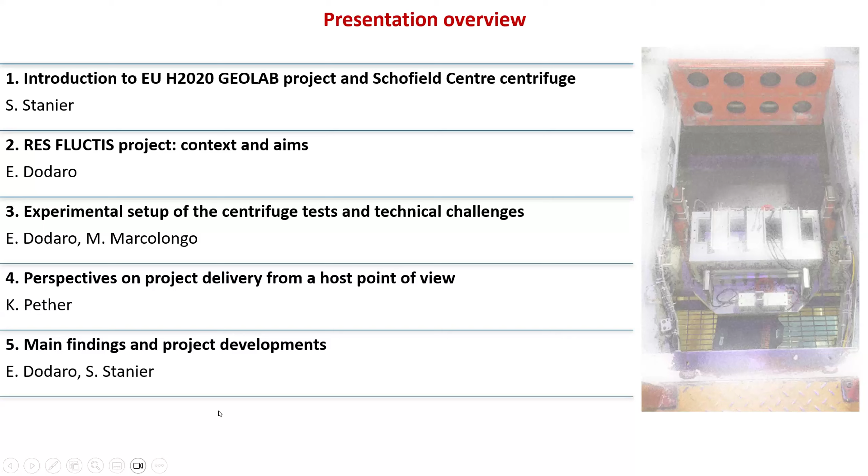Okay, here we are. First of all, why GeoLab? What is GeoLab? GeoLab is a consortium of partners across Europe that each have a piece of physical infrastructure that can be used for physical modeling of geotechnical problems.

The focus of GeoLab is on critical infrastructure that's threatened by climate change, extreme weather, geohazards, aging, intensified usage, all of these kinds of things.

The idea of GeoLab was that it was to be a network across which the whole of Europe could have access to these disparate and different facilities that each had different capabilities for performing physical model tests. So the idea of GeoLab was to bring those facilities together.

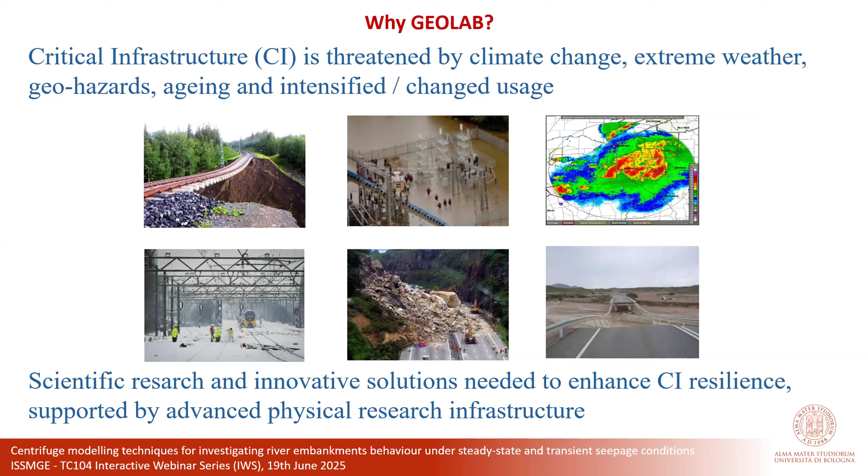We had 3 separate competitions for funding for non-participants of GeoLab to apply for, and they were each targeting one of the facilities that we host across Europe, which you can see on the next slide.

So GeoLab, if you think about it in terms of the infrastructure it provides, it's just a kind of one-stop shop going from small-scale laboratory testing, which we focused on mainly in Slovenia, but quite a lot of the other facilities have aspects of laboratory testing that were available to participants too.

We have a large number of centrifuges, which is what we might refer to as our mid-scale modeling approach - small-scale models, but with stress similitude accounted for in a centrifuge. There were 7 of those dotted around the various facilities in various forms: beam centrifuge, drum centrifuge. We've even had one be commissioned during the duration of the GeoLab project itself, in Zurich.

Then there are what we call large scale, and there are 3 such facilities looking at full scale testing in the lab, or close to full scale. And then finally, we had 1 field testing suite in Norway.

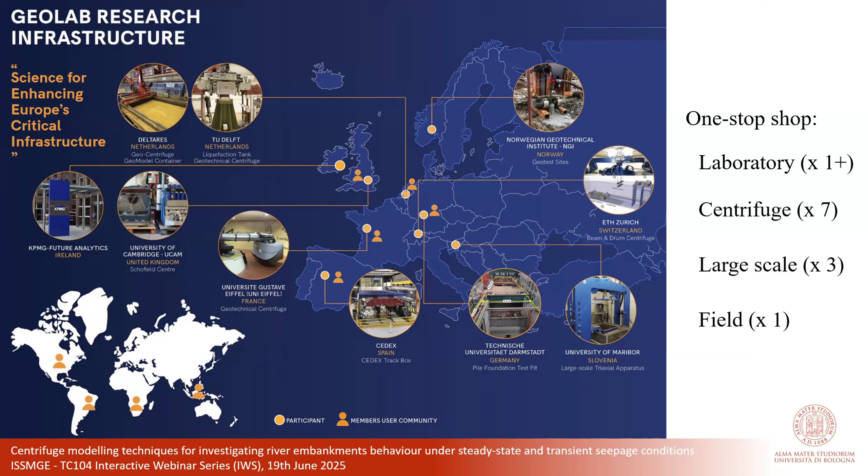So altogether, you can see you can cross the scales with the infrastructure that's available for physical modeling at these different institutes. Today's project is going to talk about a project conducted at the University of Cambridge. Moving on to the next slide.

As I've already said, there were 3 rounds of peer-reviewed project calls. The calls were on, firstly, experiments that provide or prove innovative solutions to enhance the resilience of critical infrastructure in Europe. The second call was on experiments to study the pressure on critical infrastructure, particularly impacts of climate change, aging, increased usage, etc. And the third call was about doing experiments that would complement numerical work.

Trying to validate numerical techniques with experimental data. And so across GeoLab over the last 5 years, there were 24 projects awarded that involved 137 separate individuals at 74 institutions and companies. So what we're going to talk about today is just one of those projects.

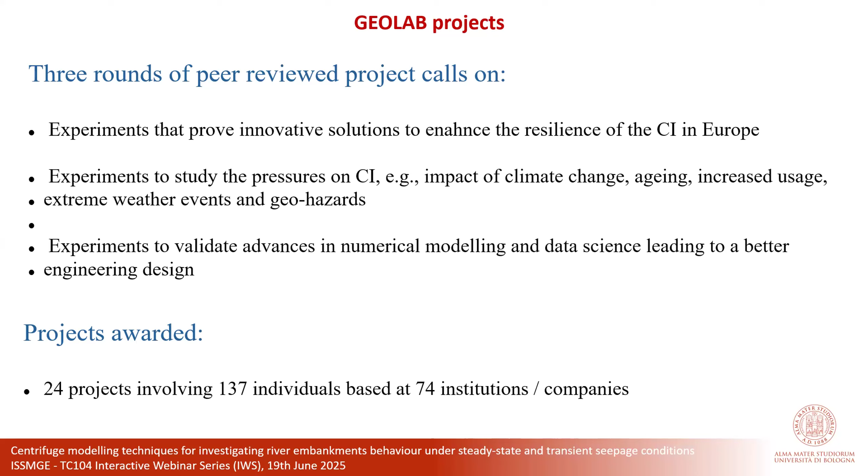Moving on to the next slide. So the focus of today's talk is the Res Fluctis project. It's assessing river embankment stability due to floods, and particularly focusing on unsaturated conditions in the embankment.

The aims of the project were to look at the hydromechanical behavior, but in particular to focus on the effects of the partial saturation in the embankment itself, which is not accounted for in design and can have a significant impact on stability. So what we were really interested in was the failure mechanisms during the onset of slippage of the embankment.

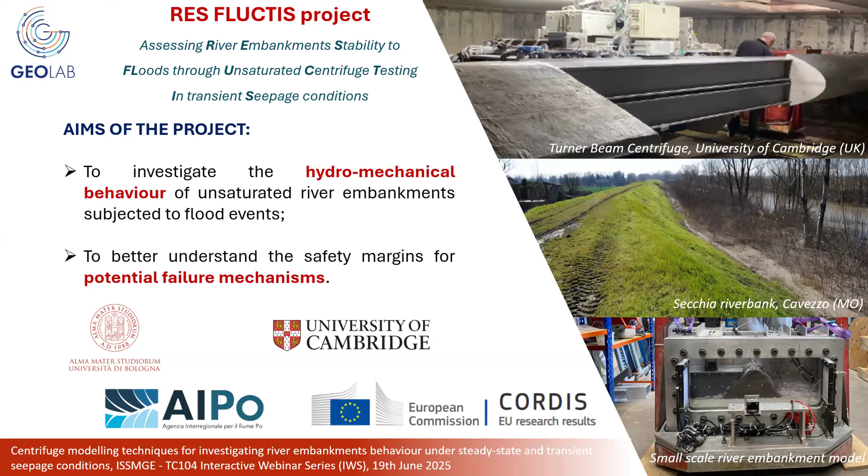And with that, we'll move on to the next speaker, and Eleanor is going to talk you through the context and project aims. Okay, thank you very much, Sam, for the introduction, and good afternoon to everyone. As Sam has already said, I will move quickly to the motivation that led to the GeoLab Res Fluctis project.

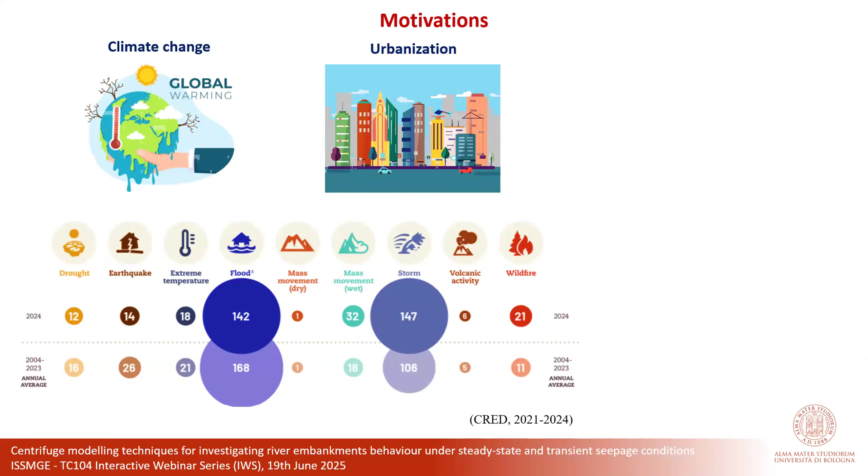We can see that from a geographical point of view, the events were quite unevenly distributed, with a concentration in Western Europe and Southern Europe.

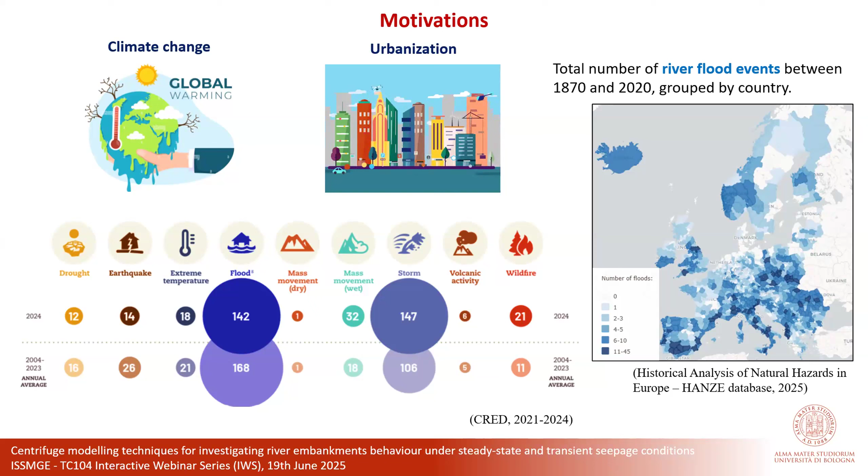Italy was one of the countries most affected by this event, causing casualties, damages, and huge economic losses. So the situation in Italy is

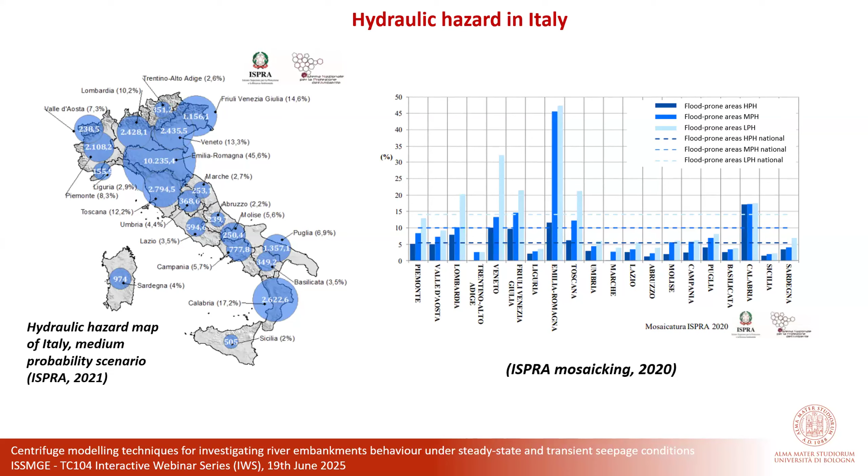and secondary artificial drainage channels. If we talk about Emilia-Romagna, we cannot forget to mention the devastating effect of the flood events that occurred in May 2023, which affected more than 100 rivers, and we observed more than 66 main collapses on 16 rivers.

So the situation was really devastating. Here I reported some pictures and a video from the cited events, and from a subsequent one that occurred in September 2024, in exactly the same areas.

With the red line, you can see the original shape of the embankment section, and with the dashed line, I tried to highlight a typical sliding surface that occurred during the event.

All these embankments present some typical characteristics. They have a height above ground level between 5 and 10 meters, an inclination of the slopes up to 35 degrees, but sometimes in critical sections it can reach 50 degrees.

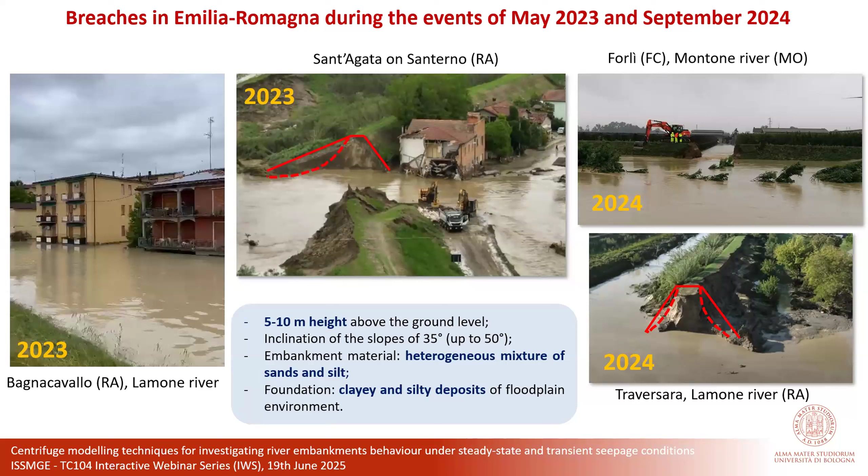The material constituting the embankment is usually a heterogeneous mixture of sands and silts, while the foundation is characterized by deposits of fine-grained material. So if we look at typical failure mechanisms for this kind of earth structure, we can

subdivide them into two big families: hydraulic collapses and structural collapses. From our point of view, the structural collapses are much more interesting, because hydraulic collapses are related only to a capacity problem related to the impoundment of the riverbed.

On the structural collapses, we can identify three main families, all related to the action of the river. We can identify external erosion, which usually affects the inner side of the embankment. Then slope instability, which will be the focus of our project, and we will see some examples of this kind of instability observed in the centrifuge.

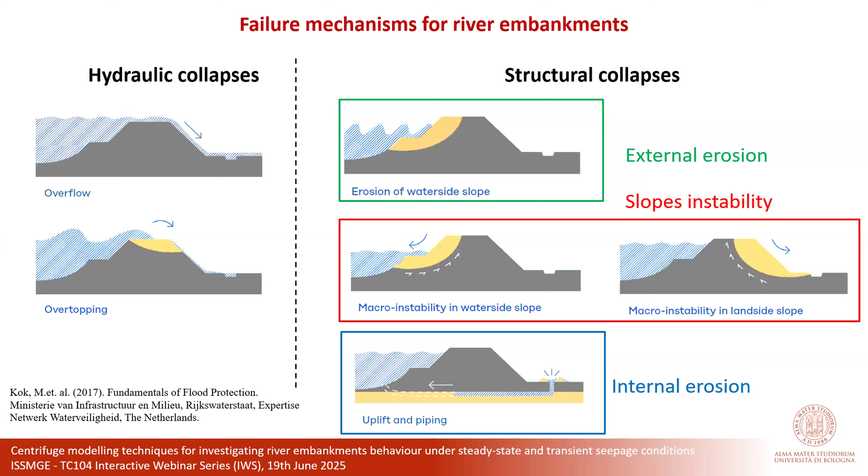And then internal erosion, which is a huge family of mechanisms related, for example, to uplift and piping. But what does it mean, assessing the safety and stability conditions of a river embankment?

The stability of these particular structures is intimately linked to the seepage characteristics. So we need to start from the identification of the most critical hydraulic loading condition, and after defining the seepage characteristics, we can determine the factor of safety with respect to a certain failure mechanism.

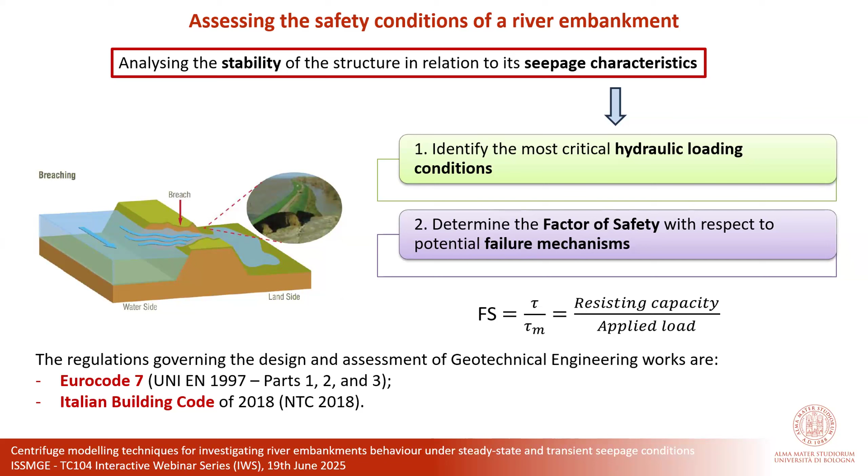In current engineering practice, the regulations that govern the design and assessment of geotechnical engineering works, among which are, of course, river embankments, are Eurocode 7 and the Italian Building Code of 2018. These regulations are not specifically regarding the hydromechanical behavior of river embankments.

So they usually make some simplifying assumptions. For example, they prescribe considering steady-state seepage conditions in equilibrium with the expected maximum water level, and the effect of the variation of degree of saturation, so the effect of partial saturation, especially on the shear strength of the soil, is often disregarded.

This leads to over-conservative stability results, which is not usually a big issue, so it cannot be considered a proper drawback. But more importantly, we don't know the effective safety margins toward potential failure mechanisms. And this is very bad news, because it's not possible to decide on an intervention priority.

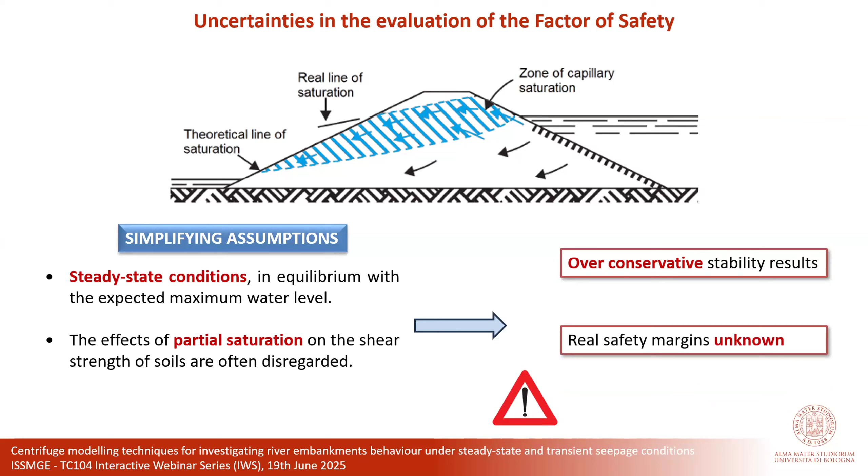So in the subsequent two slides, I reported the results of two numerical finite element analyses conducted both in transient seepage conditions and in steady-state seepage conditions, to highlight the implications of considering these two different hypotheses. The effect of partial saturation is taken into account in the first one, but not in the second.

So I considered a typical geometry and characteristics of a section of a tributary of the Po River embankment, and I performed a calculation considering a realistic, real hydrograph recorded during a high water event that occurred on the 6th of December 2020.

So we can clearly see that if we start from initial conditions that consider partial saturation, even the main hydrometric peak recorded during the flood event is not able to saturate the core of the embankment. While if we consider steady-state seepage conditions in equilibrium with the maximum water level, of course, all this part is saturated.

Yes, but let's see what questions come from the audience. Of course, if you would like to ask a question, please raise your hand or just activate your sound and come forward. Maybe ask one question just to start.

You mentioned partial saturation. So which part is partially saturated and which part is not, or is it all of it?

I suppose this will come later on when you describe the experiments. But now the question that comes to mind is, how big is this partially saturated zone in the prototype?

Well, this is very difficult to estimate, and this is the reason why we need to investigate this contribution, because even if in the laboratory we have the possibility to install instrumentation and properly control all the boundary conditions, on site this kind of analysis is more difficult. So one of the key issues on site is estimating the initial conditions when we have, for example, a high water event. We can use pore pressure transducers, tensiometers, but the cost of installation is quite high and it's not very easy to have a proper monitoring layout distributed along kilometers of these earth structures. So you have to imagine that this is very difficult to estimate.

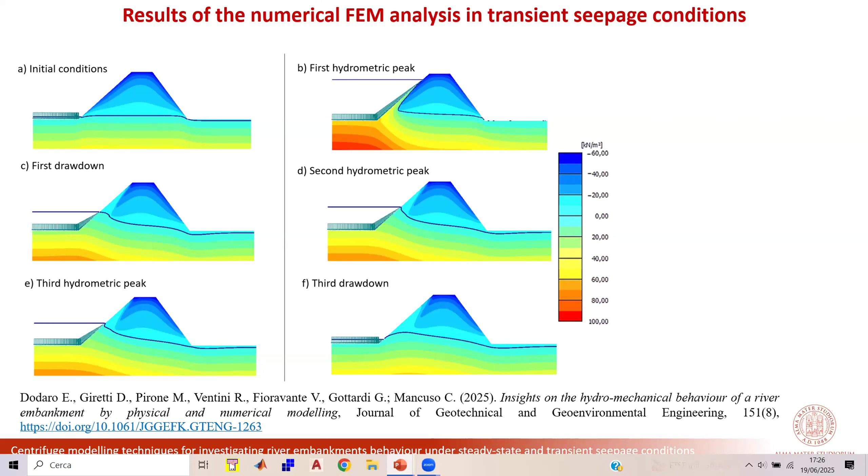Yes. So if I can add something to this analysis - I went pretty fast, but you can find all the detailed calculations in the article I reported at the bottom of the slide, which has been recently published in the Journal of Geotechnical and Geoenvironmental Engineering.

So regarding your specific question, this particular distribution was obtained at the end of the in-flight consolidation of a centrifuge test used to calibrate this predictive numerical tool. We performed a series of centrifuge tests inspired by river embankments of the tributaries of the Po River, which were characterized by peculiar hydraulic and mechanical characteristics. At the end of the in-flight test, we were keeping the water table at ground level.

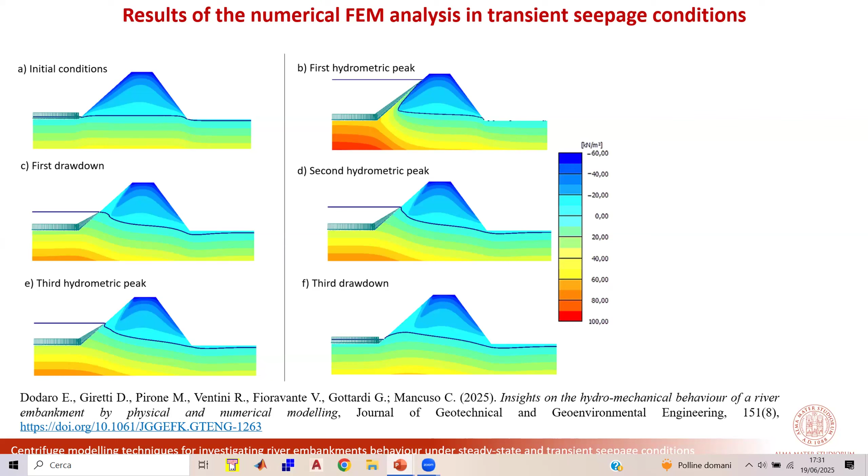Okay, so now we can start talking about the experimental setup of the two centrifuge tests that I performed in collaboration. Can you hear me? Yes, okay, I think there was an interruption. So I will now illustrate the experimental setup of the two centrifuge tests that I performed in the context of the GEOLAB RES FLUCTIS, and the technical challenges that we faced.

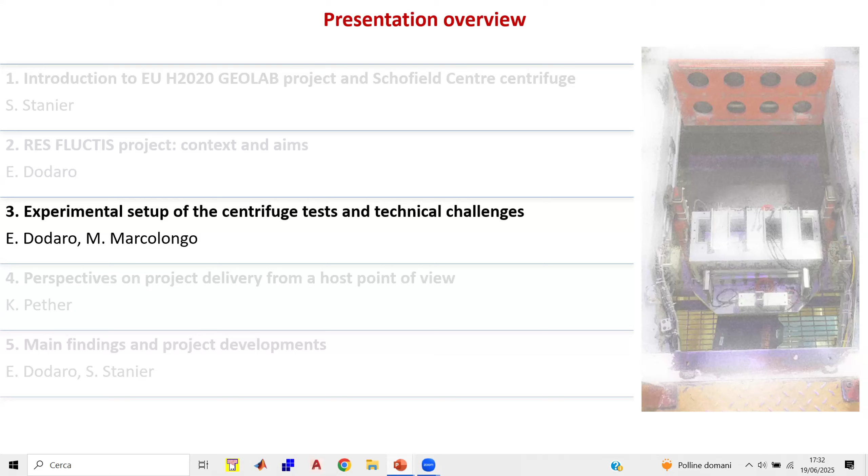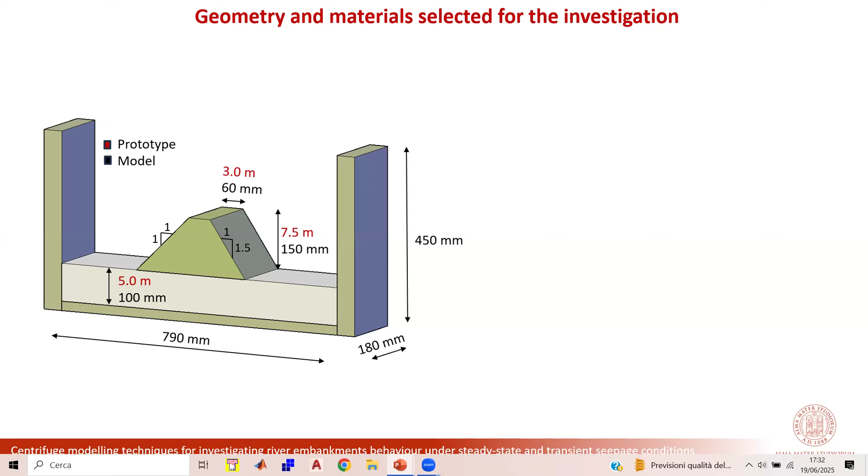First of all, we will focus on the 3D geometry of our model, and you can see the scheme on the left side of the slide. With the black numbers I indicated the dimension of the model, while with red numbers you can see the corresponding prototype, considering a scaling factor of 50, since the acceleration imposed during the test was 50g.

The material selected for the reconstruction of the embankment is a compacted silty sand, which was taken directly from a floodplain area of the Secchia River in Soliera. It was our stakeholder, AIPO, an interregional agency for the safeguard of the Po River, which directly provided us with the material. The foundation is a very well-known material in the literature, a Speswhite kaolin clay.

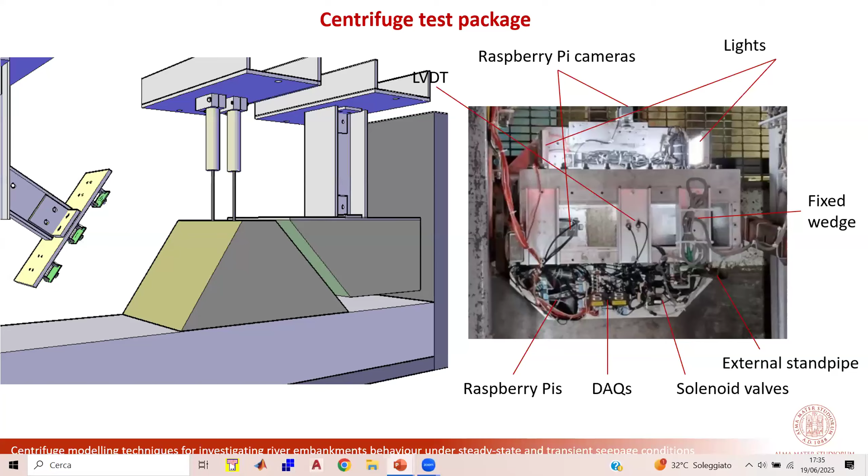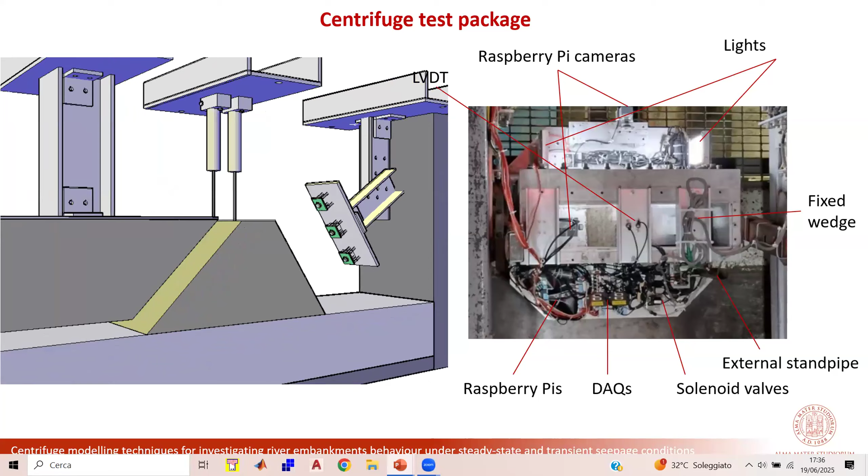In this slide, you can see an animation showing the experimental setup, which includes on the river side a fixed wedge that was used to reduce the water level, the water stored, and to make changes as quick as in reality. You can also see 2 LVDTs sitting on the crest, devoted to the measurement of the settlement of the embankment.

On the land side, connected to this adjustable gantry, you can see 3 Raspberry Pi cameras that could be changed in position. On the right side, you can see the overall centrifuge test package.

On the top side, there is an additional Raspberry Pi camera that was able to look at the section view of the embankment, and also lights, while on the rear side you can see the data acquisition system, the Raspberry Pis, and an external standpipe, which I will come back to later, that was devoted to controlling water levels during the test.

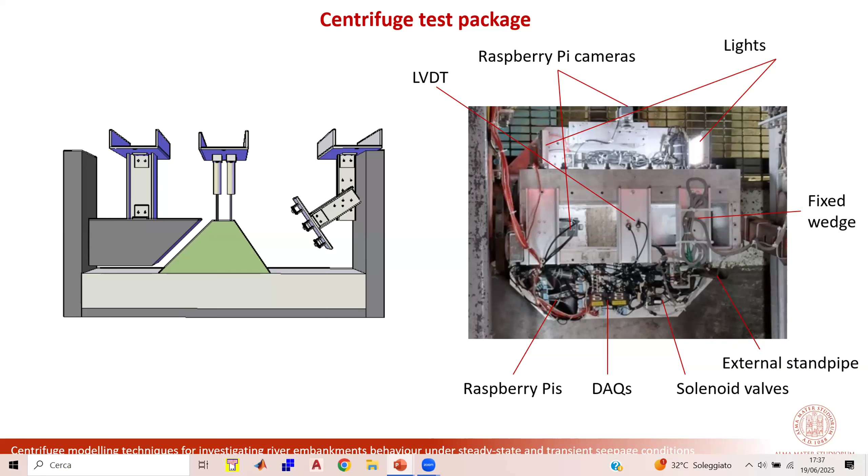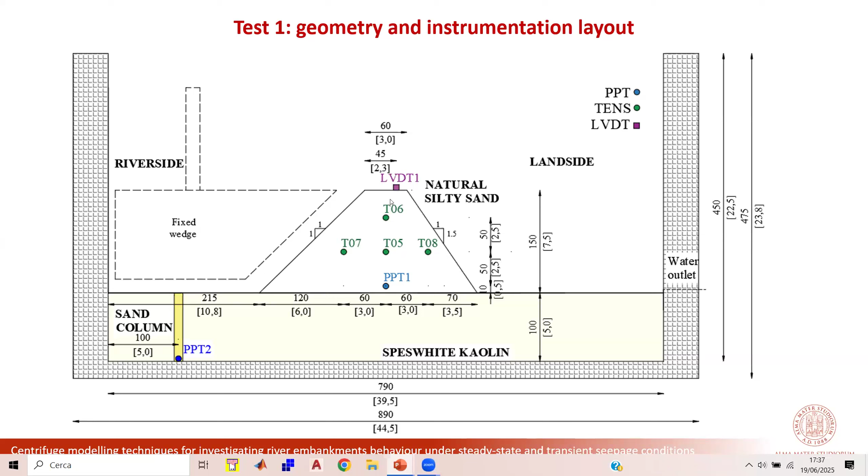Regarding the geometry and instrumentation layout, the middle section of the embankment was quite extensively instrumented, considering also the dimensions, since we are talking about an embankment with a height of 15 centimeters and a foundation of 100 millimeters. The middle section was instrumented to record the time-dependent variation of suction and pore water pressures, and with the LVDT we were able to measure the crest settlement.

During the second test, we kept the same experimental setup and model geometry with the addition of a few extra instruments. For example, we added at the lower part of the embankment 2 additional tensiometers, and on the crest an additional LVDT. This way, we were able to measure separately the settlements of the land side and the river side part. Okay, now let's go to the core of this webinar.

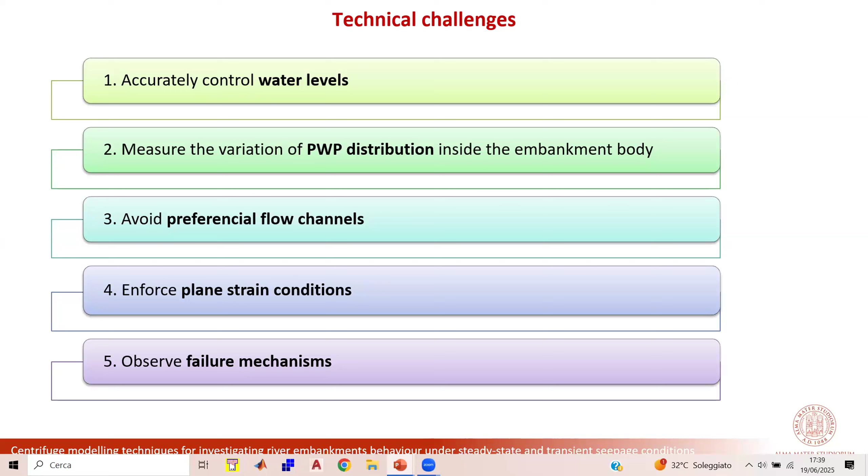So the technical challenges that we faced during the preparation of the model: first, I have to highlight the need of controlling in a very accurate way water levels, because we needed to impose both steady state and transient seepage conditions. The second need was to measure the variation of pore water pressure distribution inside the embankment body, in order to connect this distribution with the stability in a future analysis. We were also worried by the formation of preferential flow channels between the model and the strong box, which is a key point because if you have preferential flow channels, it's very difficult to keep a water level stable and continuous during the test. We also tried to impose plane strain conditions and to observe a failure mechanism.

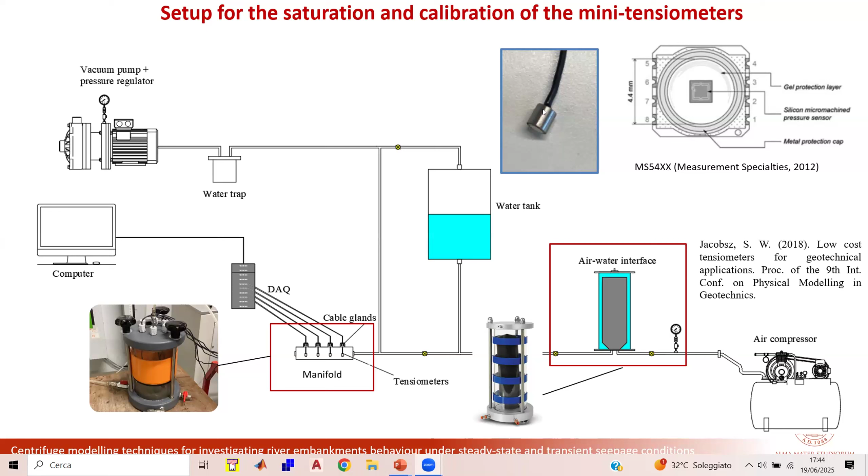Even though we were able to construct the instruments and the setup for calibration and saturation, unfortunately, after initial checks that included an evaporation test and comparison of the trend of suction over time with reference tensiometers, we noticed that even though the trend was really good, directly reproducing the same values as the reference tensiometers, they cavitated at a very low suction. Of course, it was not possible to use them in a centrifuge environment.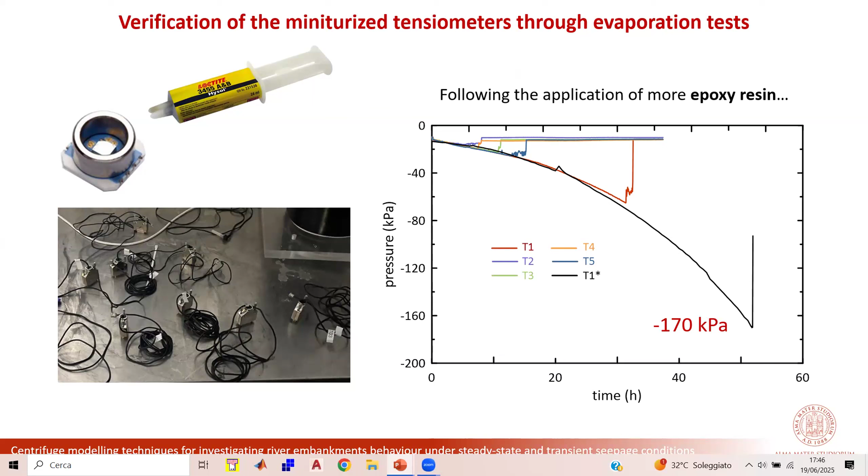Now I would leave the floor to Mr. Mario Marcolongo, who will describe the techniques used for the preparation of the model, starting from the foundation, and then he will describe the procedure used for the reconstruction of the embankment. Please, Mario.

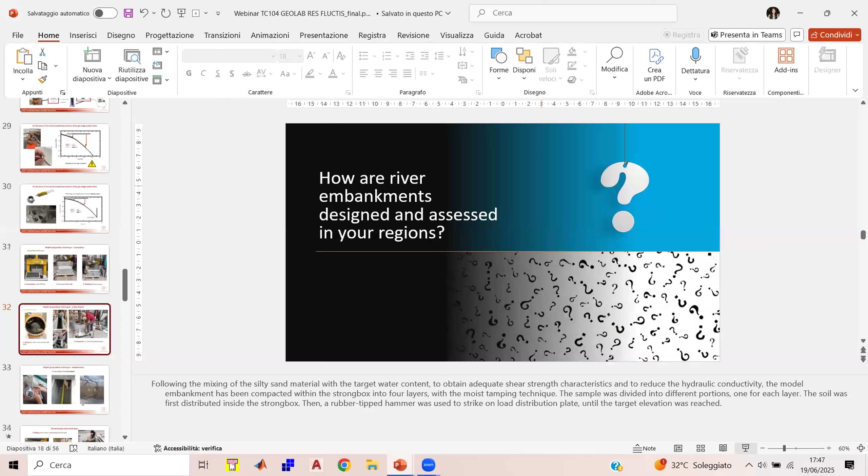As Alan has just said, I'm going to talk about the technical aspects we faced during the preparation of the two final samples. To prepare the foundation, we mixed the Speswhite kaolin with deaerated water to obtain a slurry with a water content around twice the liquid limit.

After that, we poured the slurry into the strong box and placed it under the hydraulic press for consolidation, applying an effective stress of about 850 kilopascal. At the end of the consolidation process, we gradually unloaded it, removed both side walls, and trimmed the clay layer to a thickness of 100 millimeters.

Later, we mixed the silty sand material with the target water content in order to achieve a suitable shear strength and a low hydraulic conductivity.

Then we proceeded to build the model embankment inside the strong box in 4 layers, using the moist tamping technique. For each layer, the soil was first evenly distributed inside the strong box and then compacted using a rubber-tipped hammer, which was used to strike a load distribution plate until the target compaction was achieved.

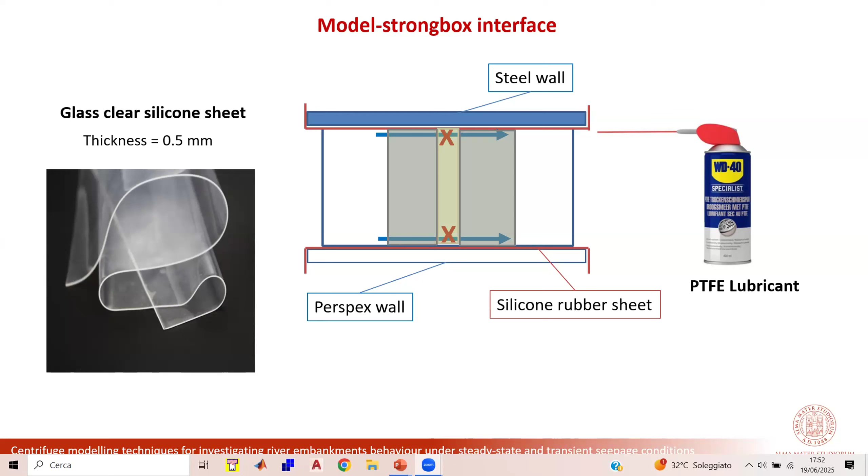Between the model and the strong box, we put a very thin layer of glass clear silicone sheet. And to remove the friction between the two elements, we also sprayed PTFE lubricant. So the main characteristics of these two elements were these three.

The rubber mat was very smooth, and this concurred to the enforcement of plane strain conditions. The material was also very soft, and the grain part of the embankment was solidal to this element, so this contributed to avoiding preferential flow channels.

So this leads to the end of the experimental part, regarding the experimental setup and the technical challenges, and to the second interactive part of the webinar. So have you encountered similar technical challenges during model preparation? And have you ever made compromises to overcome difficulties in technical modeling? And if so, how did they impact the overall results? Of course, I'm available for any kind of questions.

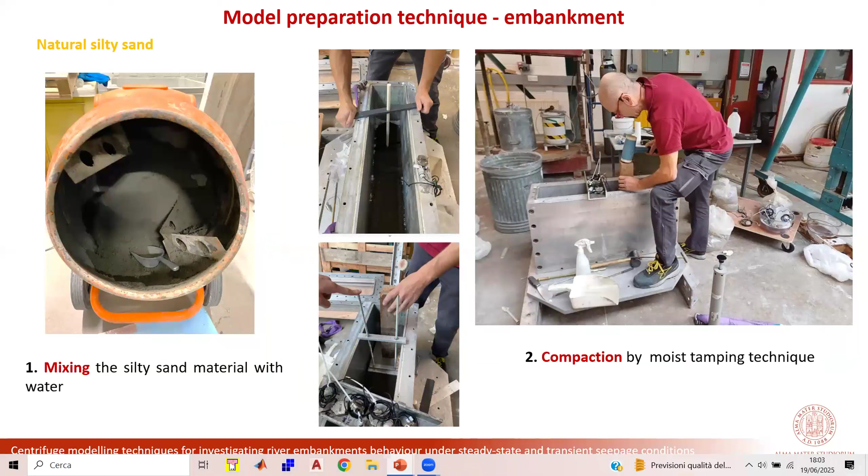Hi, thanks, it's really interesting so far, especially that styrofoam block. I think you mentioned you were considering your time scaling with n squared because it's like a diffusive process. Is that still the case if it's partially saturated, where you might have advection and infiltration?

This is a very good question. As far as I can say, since I modeled the process through numerical analysis, not in this case but for previous similar tests, the scaling laws are quite respected even if you have an unsaturated contribution. But the process of filtration is slower, due to the fact that the material, when partially saturated, has a lower permeability than the saturated part.

So just to clarify, because it matched well with a large-scale numerical model, the argument is that the process is basically diffusive? Yeah, okay, interesting.

It's always a worry that we would make a model that somehow distorts the scaling, and it's hard to know, right? I totally agree, the back analysis is very challenging.

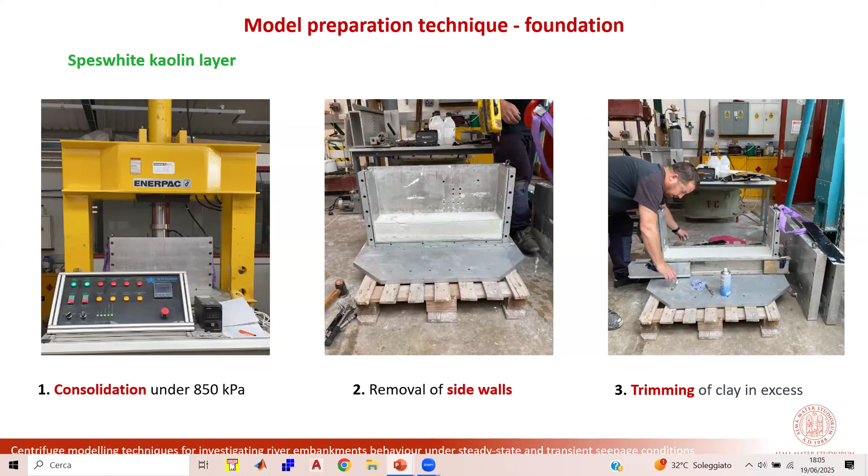Thank you. Okay. Good. Is there any other question at this? Just a brief one. Yes.

With the edges, you said you didn't get any diffusion between the model and the edge of the box and the PTFE layer. Do you think there was still any potential for preferential flow that didn't cause diffusion, and it would have changed the saturation profile and/or the flow across the embankment rather than parallel to the embankment?

Yes, I think it could happen, but in our case we haven't observed this kind of mechanism. I think that when you observe preferential flow channels, the main concern is not related to the retention profile, but the main issue is that in the centrifuge you have a very small volume of water impounded. So when you have a channel that directly connects the river side to the land side, it's not easy to keep the water level constant, and so the test would be compromised.

Yeah, cool, thank you. Okay.

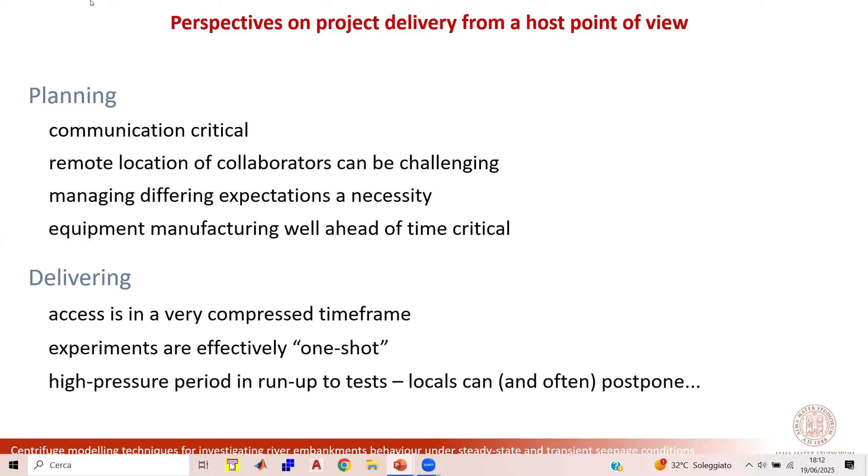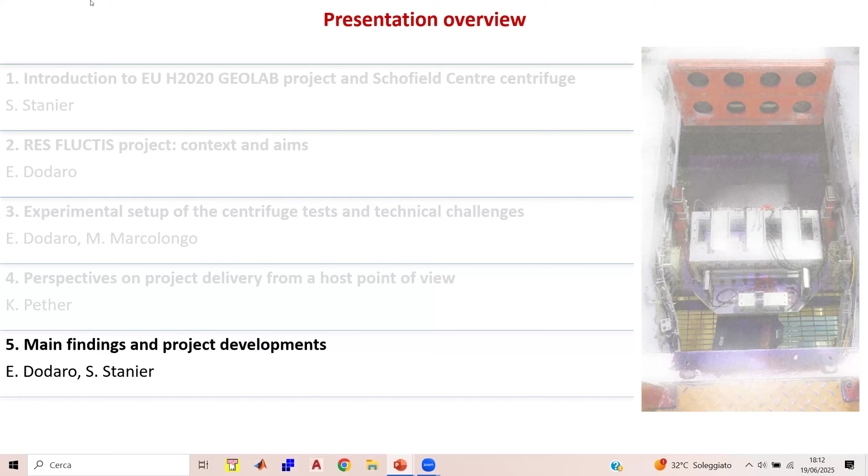Yes, so we are going to the final stage of the presentation, which includes the main findings and project developments. I will start this part briefly commenting on the results of the two centrifuge tests, and then I will leave the floor to Sam Stanier for the last part regarding stereophotogrammetry that we performed inside the centrifuge, and for the conclusion. Okay, so now let's look at the test results, specifically with reference to test 1.

Following the spin up and self-weight equilibrium, the hydraulic loading was applied in 3 steps. The first step was in equilibrium with a water level of 20% of the embankment height. Then after reaching steady state conditions, which was the focus and main aim of the first test, we applied a second water level of 50% of the embankment height.

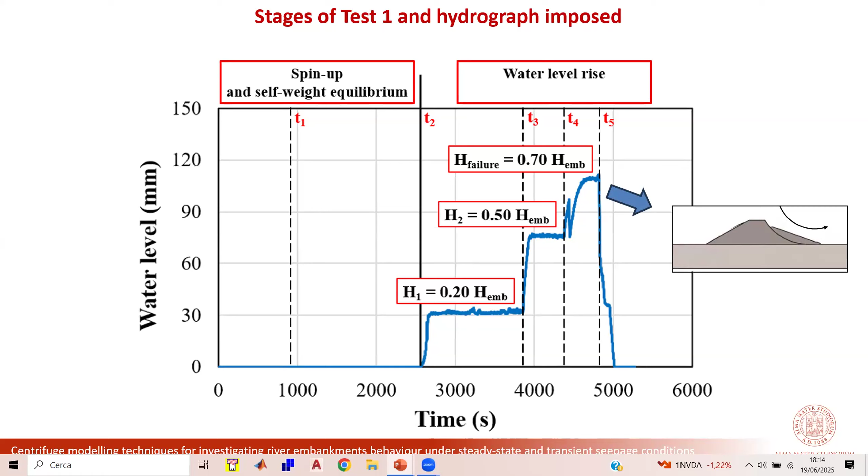In particular, what happened is a progressive saturation of the embankment body, and as a consequence we see a decrease in the effective soil shear strength, and the land-side slope collapsed.

So if we look at the displacement, we can see the trend of the vertical displacement over time recorded by the LVDT1 sitting on the crest on the land side. It showed a significant displacement during the spin-up of the model as an effect of the increase of acceleration, and then minor settlements were recorded.

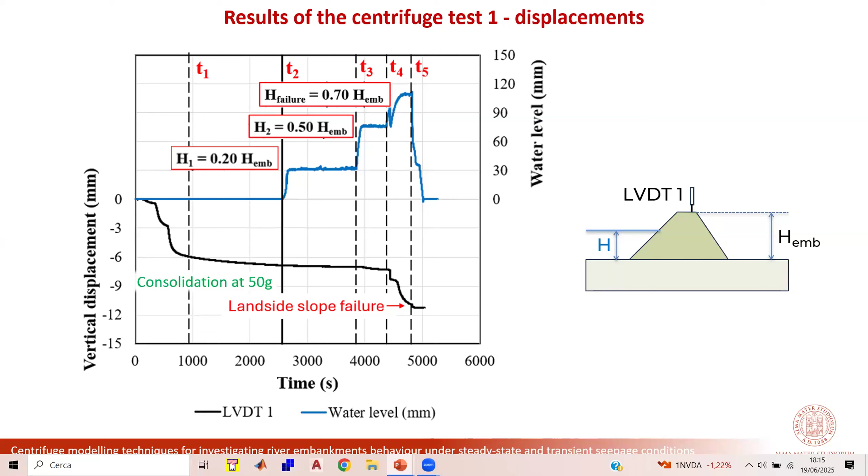This occurred during the in-flight consolidation, which ended here, and then during the application of the first and second water level. Then we observed a sudden increase during the application of the third water level, and the displacement reached its maximum value in correspondence of T5, the time instant corresponding to the failure.

If we look at the trend of pore water pressure recorded by the 4 tensiometers and 1 PPT - pore pressure transducer - embedded in the middle section of the embankment, at the beginning of the test they recorded pressures between -2 and -5 kPa, highlighting consistency and homogeneity inside the embankment.

Then we observed during the in-flight consolidation a progressive drying of the model, followed by an increase of pore water pressures that was instantaneously reflected by the instrumentation closer to the river side, and then also the other tensiometers positioned in the core of the embankment were influenced by the increase in water level.

Of course, the differences in readings are not only a function of the water level and position, but also of the retention and hydraulic properties of the soil. So to thoroughly understand what was happening inside the embankment, we need to look at isochrones of pore water pressures.

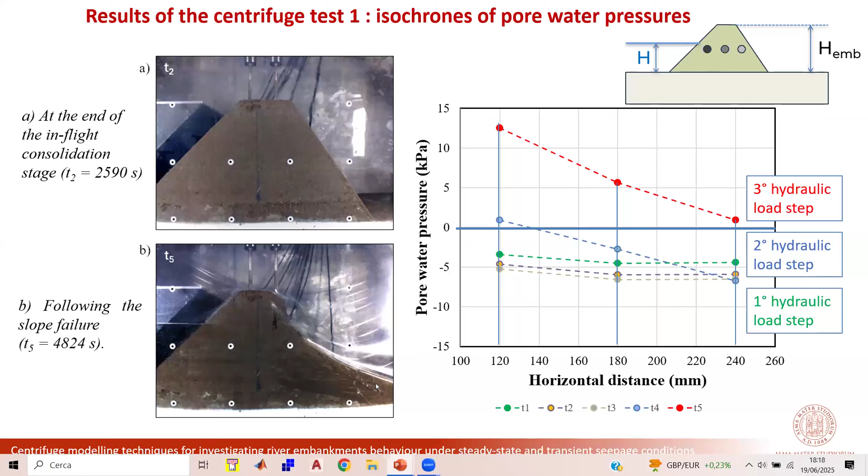And of course, this triggered the collapse of the landside slope, as we can see from this view of the front camera. Then we performed a second test that, as I said, has almost the same experimental setup, and the main change was the application of this sequence of peaks and drawdowns.

Following the spin-up and self-weight equilibrium, the water level was raised to 20% of the height of the embankment, and steady-state seepage conditions were attained. Then another water level was applied, equal to 30% of the embankment height.

Then the test became a real roller coaster, because we observed during the increase of the water level to the first peak, reaching the maximum capacity, both the sliding of the inner and outer surfaces. At this point, the embankment height - 90% of the embankment height - is not the original height, because the crest lowered, but the soil was still able to retain water.

And so we applied these cycles of peaks and drawdown. Then, in correspondence of the last peak, we observed a final triggering of a landside slope failure.

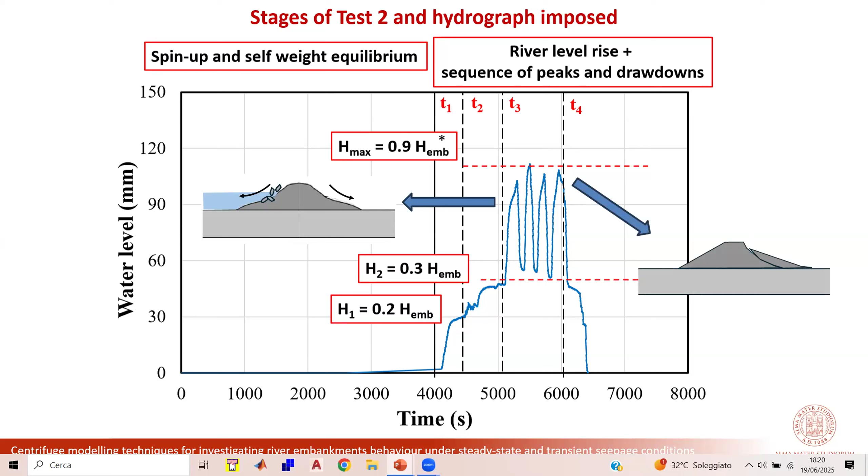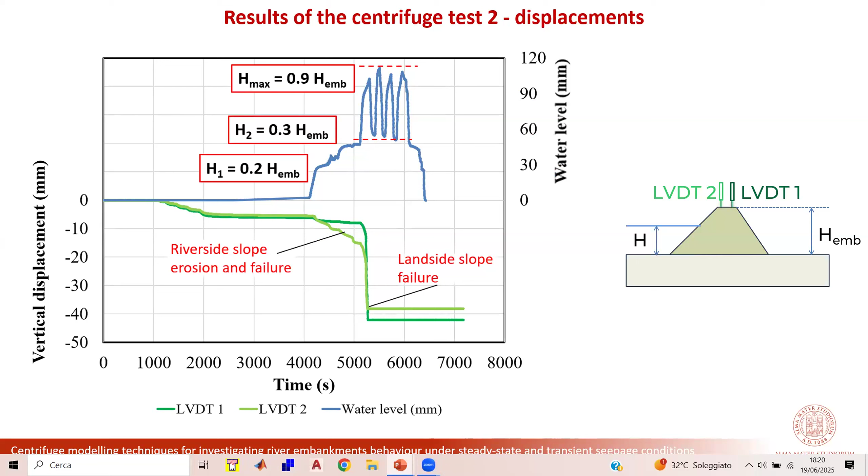So if we look at the trend of the displacement, we can clearly see that both the LVDTs located on the crest were able to follow the displacement right until the first failure happened. At that point, we could only rely on the presence of the cameras to describe what was happening regarding displacement.

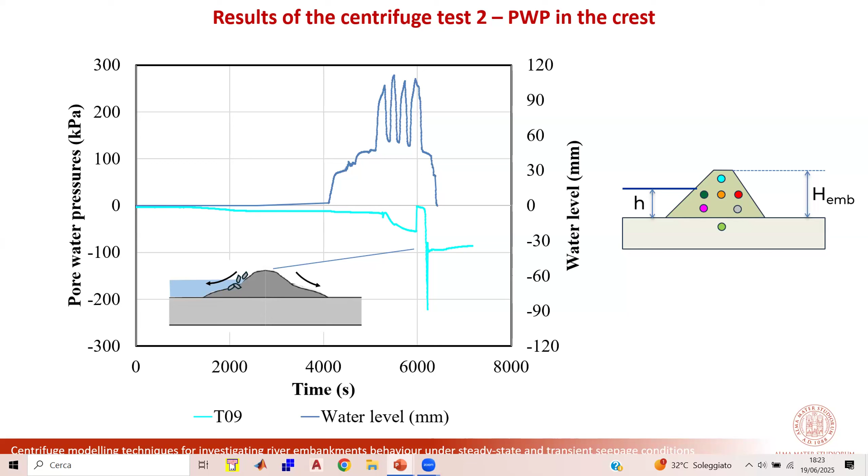It cavitated very fast. But if we look at the value of pore water pressures, we notice that it cavitated at a pressure below minus 200 kPa, demonstrating the excellent performance and reliability of all the instrumentation.

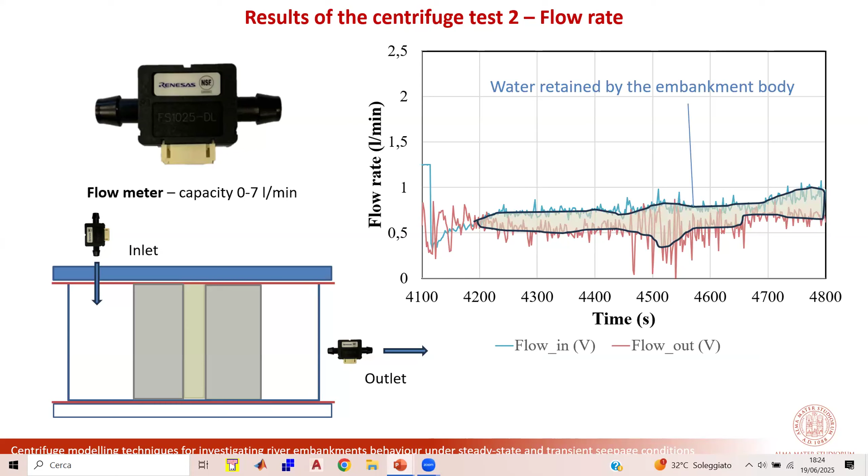Finally, if we look at the flow rate that we were able to measure during the test through an inlet and outlet point with miniaturized flow meters, we can notice that there is a volume of water that is retained by the embankment body. Thanks to these measurements, it was possible to determine the amount of water stored within the embankment body over a given time interval, demonstrating that the soil is retaining water and gradually becoming saturated.

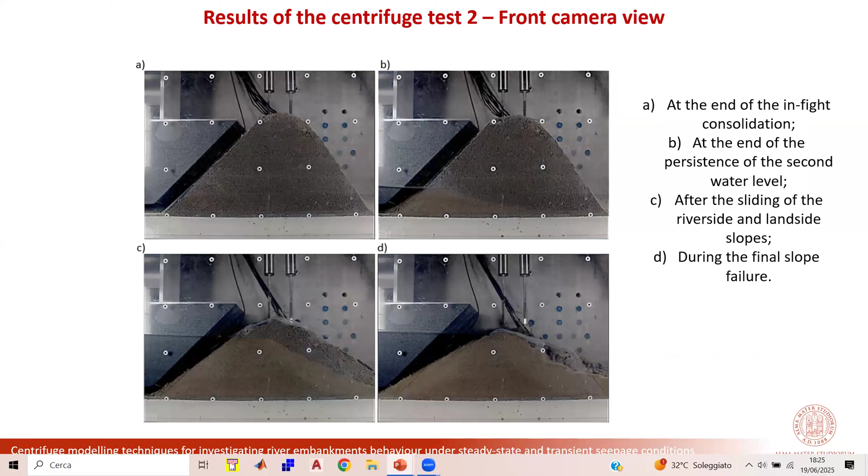Moving on, these are views from one of our 3 Raspberry Pi cameras positioned looking at the embankment face. You get a sense from this of how relatively plane strain the mechanism was. It's quite clear that it's not generated on either side of the model. In fact, we think the addition of the silicone sheets means we even take out the difference in roughness between the Perspex window and the aluminium.

You sort of get rid of that asymmetry as well, so that was a really nice aspect. We did see this live - we've got a nice little web app that takes images from the cameras, and you can scroll through the different cameras and look at the images as they're coming in live. So it gave us some reassurance on the fly that all of the hard work in the lab making the experiment was worthwhile.

So moving on, we took the 3 sets of images from the 3 cameras, and then knowing their positions relative to each other, we could input that into some very straightforward to use structure from motion software from Agisoft. They can then take those images and piece them together to give you this overall failure mechanism.

So hopefully you can see from the animation there that the failure really is very close to plane strain indeed. You can go one step further.

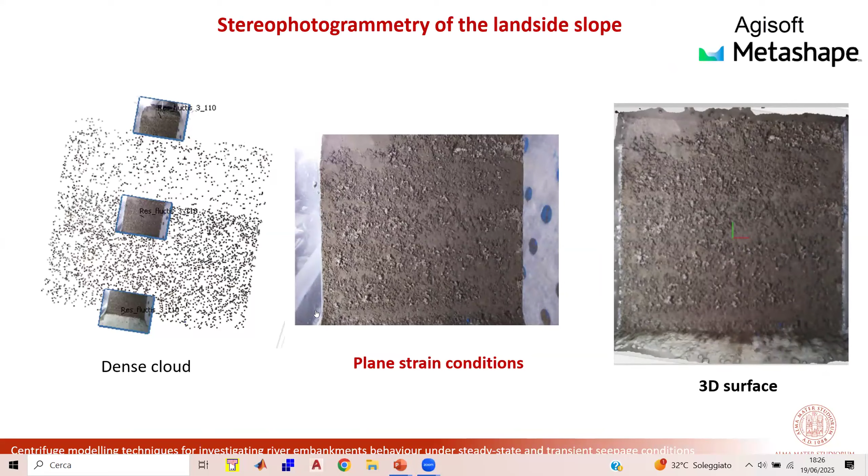So if we move on to the next slide, you can take those images and actually get some measurements directly using scaling. We had some fixed scaling points within the Strongbox environment itself. This gives you a reasonably precise measurement. I'm not sure how accurate it is, but it's certainly precise.

Here you can see that we've got a reasonable plane strain mechanism across the box. In fact, you might argue that our silicone membranes have actually almost resisted movement at the periphery, which is the opposite of what you get when you don't have them.

When you don't have the membranes, you get preferential drainage through the sides of the model, and you actually get onset of failure at the sides. Now, you might argue we've got slightly earlier onset in the middle, but we think that's preferable. I think that's a nice point for people to debate at the end of the presentation.

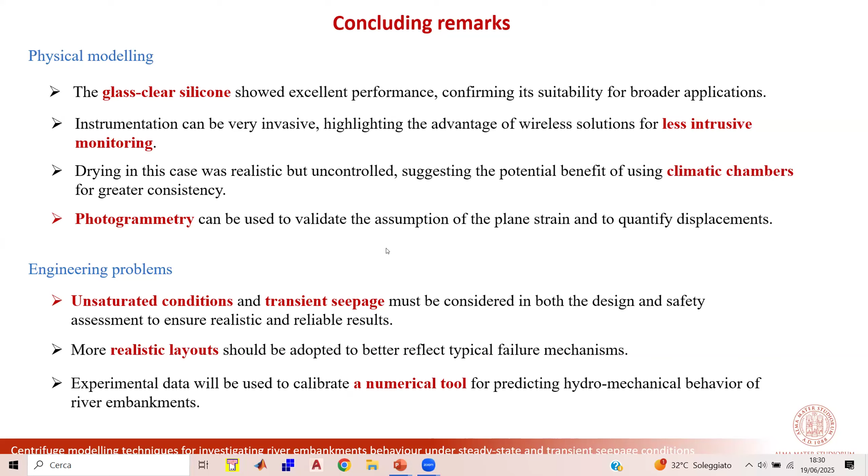Yeah, so when I compare the numerical results that you showed in the first part with now the measured tensiometer results, then I see quite a lot of difference. So it's of course good to be sure that we need to do more experiments, but if there is no agreement compared with numerical results, then the question is, what's the use? You see the pore pressures are, you come to -20 or something like that, and in the numerical simulation you come to -60. So that's really a factor of 3 difference. So you have to understand, and also the cause, I have the idea that relatively the experiment is much more permeable than the numerical situation.

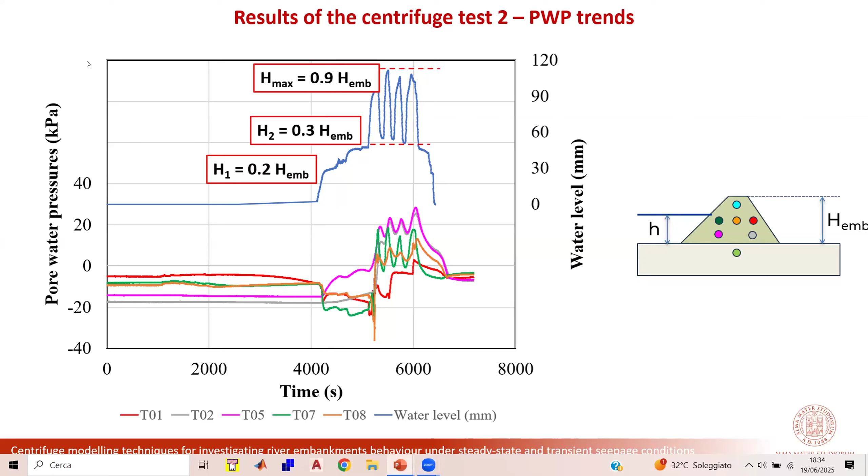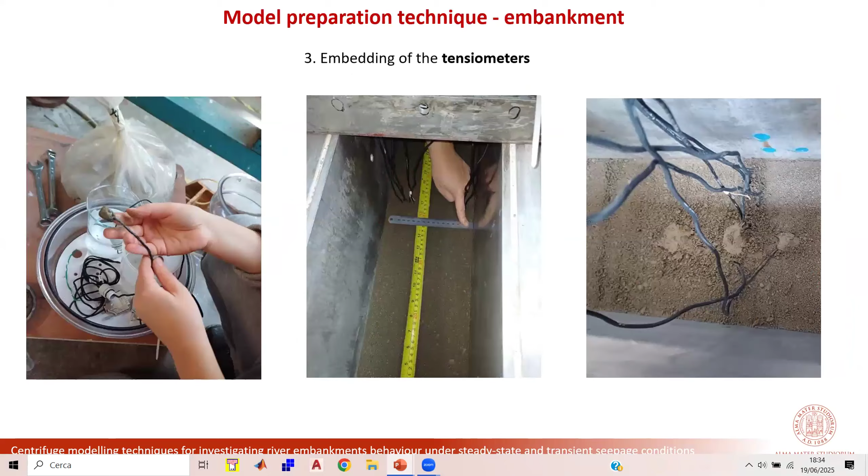But Sam, if you had - let's say, okay, the part of the sheet that is inside the soil is of course supported by the soil. If you had glued this sheet at the top, would it work also?

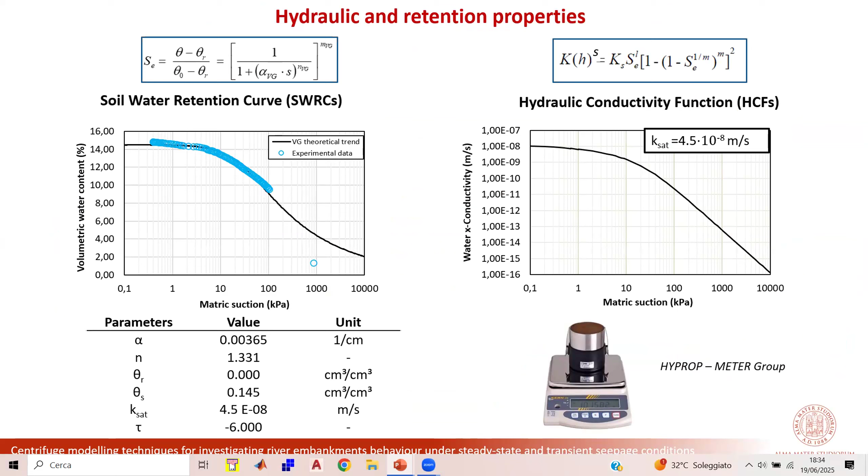I think it would work equally well, but we had 2 rounds of tests in GeoLab. The first one had that problem. We were gambling on which was the better approach for the second one, so we never tried it that way, but it was another approach we discussed. Might have been simpler in some respects, but...

If I might add something, we fixed the rubber sheet in the first test with the external screws of the strong box, so apparently it was attached properly to the strong box and especially to the perspex. But considering that we are performing tests at 50G in the centrifuge, there is a lot of wind, let's say. So even if at the beginning everything seems good, during the test we could see from the cameras that it was moving.

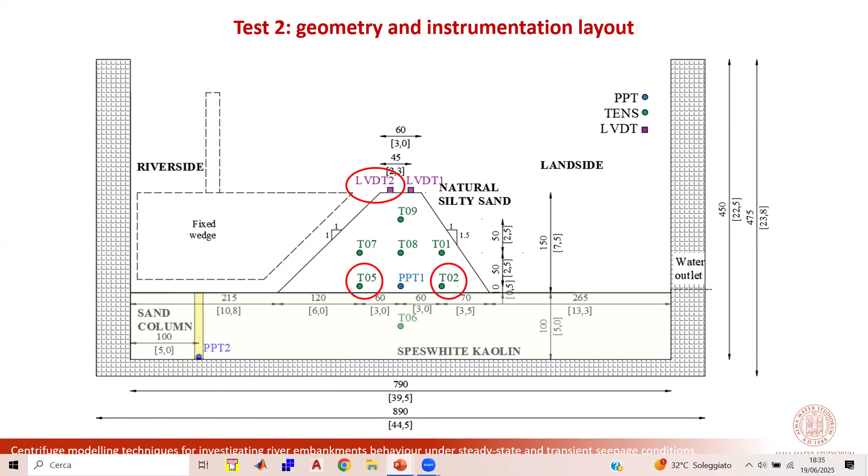Okay. Good. Is there any other question or comments?